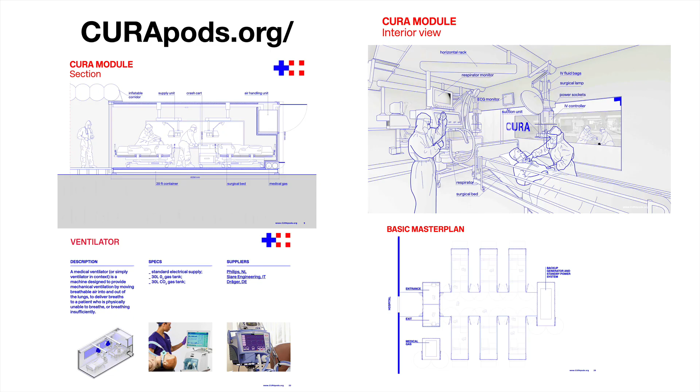This is a follow-up to Workshop 1 and 2. In Workshop 2, we looked at rapidly deployable healthcare facilities such as from Jupe and CURA pods, and we created modules from these standards published on the web for CURA pods using the Program to BIM website. We had Arthur Kurland from the University Health System participating in Workshop 2, and one of his questions was, can we use the CURA pods method of using containers to rapidly deploy healthcare facilities?

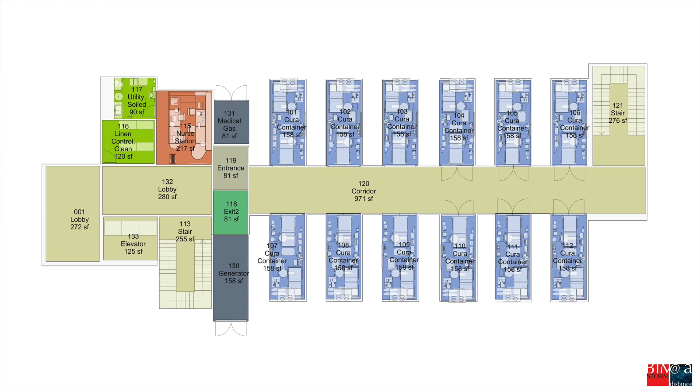And then also disassemble them and move them to a new location as needed? So we created a module of 12 units, as was suggested by Broadus. The layout is not 100% complete, but conceptually we wanted to get a rapid layout to see how it would fit on the site, and looked at all of the assets and content, and even did a scenario that said maybe it can go up more than one story. If you start stacking containers, is it even possible? We went ahead and tried that in this follow-up workshop.

We also took the requirements that were set up from Workshop 1 of what is required for a nursing area and support stations for a healthcare facility. Again, this is an early layout. It might have some errors in it still because we still need input from healthcare designers and facility planners. And we got some early cost estimates based on this layout. So that's what we're going to look at today, looking at the University Health System's facility in San Antonio.

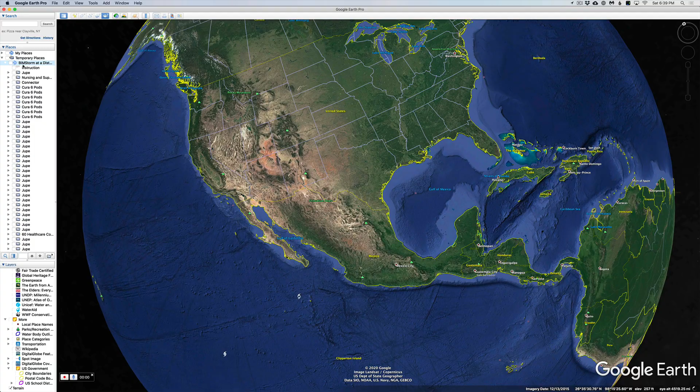And the scenario is, let's actually switch over live now. What Arthur Kurland suggested was a site in San Antonio where there's an existing University Health System to the south of San Antonio City, and there's a large empty parking lot on what used to be, appears to be, an elementary school site. He suggested we could actually do a layout there and do a study of how these CURA pods and temporary facilities can be laid out on this site.

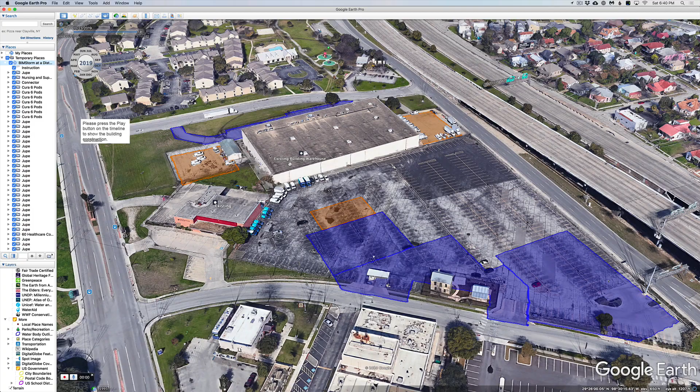Here is the existing healthcare facility, and to the north is the site that we selected, this triangular shaped site. So in the Onuma system, we actually laid out a preliminary site, did some studies on parking areas and areas where we could actually lay down some buildings.

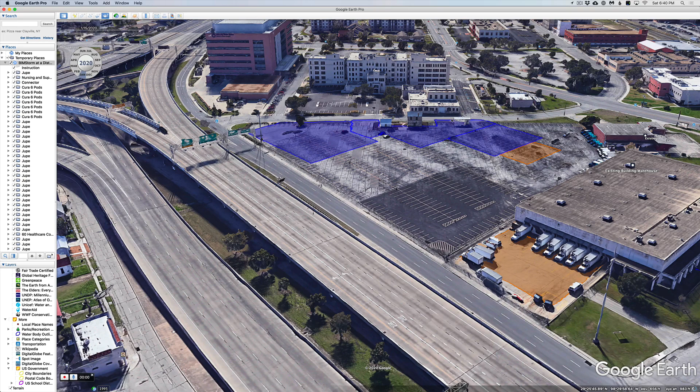The scenario is, if we start with the Jupe system, which can be put on trailers and flat packs basically, with 24 units on a trailer, what would it look like? We added a timeline to the building information models and said, what happens if we start building them sometime in May? What's the first thing that would happen? That would be the trucks showing up with the Jupe pods - 24 per truck, 40-foot trailer that can fit as a flat pack. And then as you lay them out, each of the units is here. So these are kind of like tent-like structures.

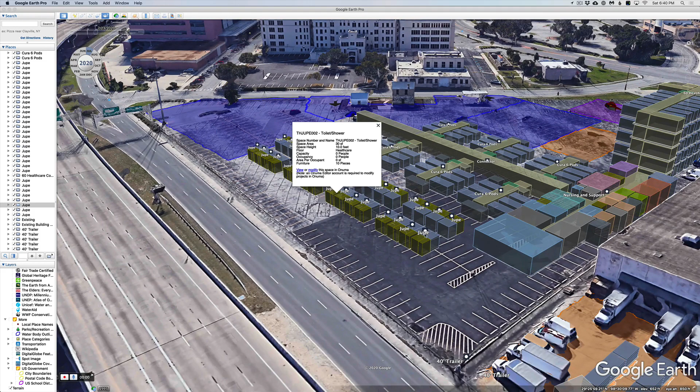That's one solution. The next solution is looking at the CURA pods that we looked at earlier, the containerized system. This will take a few days longer maybe, but if it's rapidly deployed by trailers and stacked, then possibly we can get a flat area here.

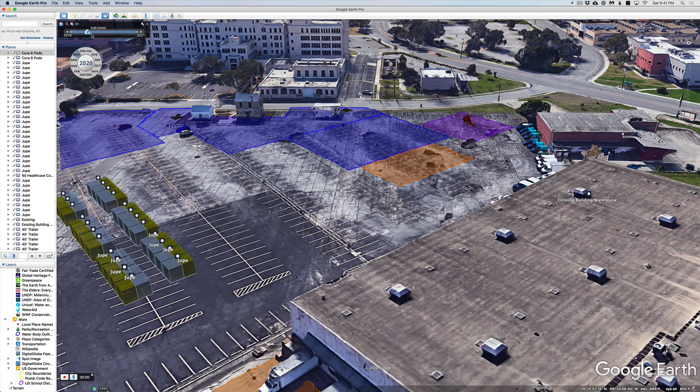And if we keep going with the timeline, you can see the potential for a tower being put in there. So this is a total of 60 units in this tower and 48 in the flat area for the CURA pods themselves. We also tried to look at scenarios of where we can land.

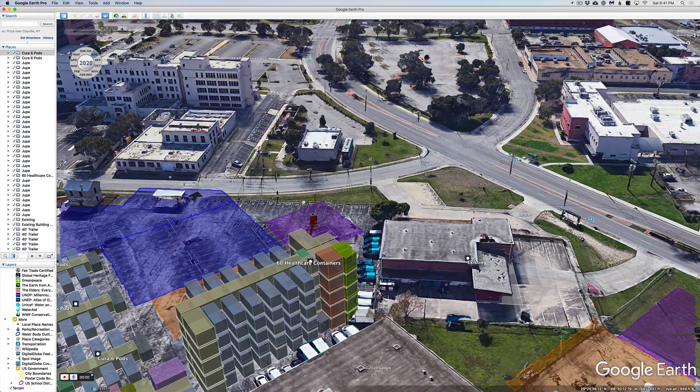Arthur was suggesting a helicopter pad, so we have a helicopter landing area there. And logistically, does this work? That's the scenario that we have here.

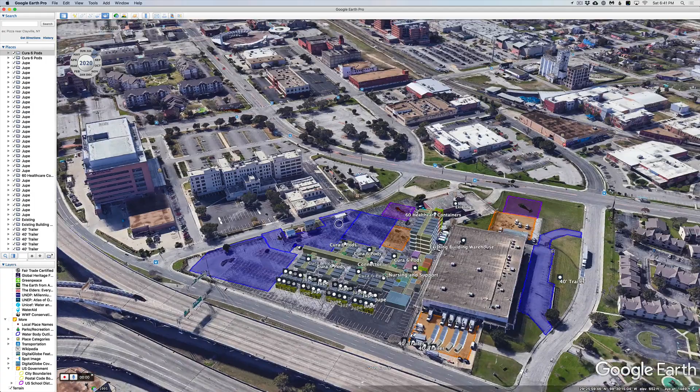If we have a site that looks like this, we have a place to load and offload trailers, a place to land new units, and even to decommission these as we go along. You can see in the timeline as it goes along, maybe in half a year or whatever, maybe it's time to take these units down and pack them up and move somewhere else.

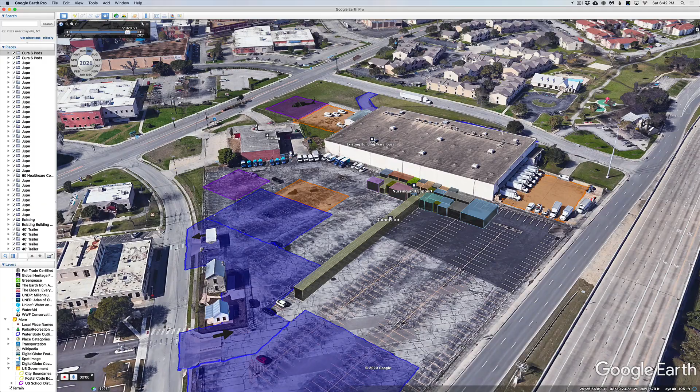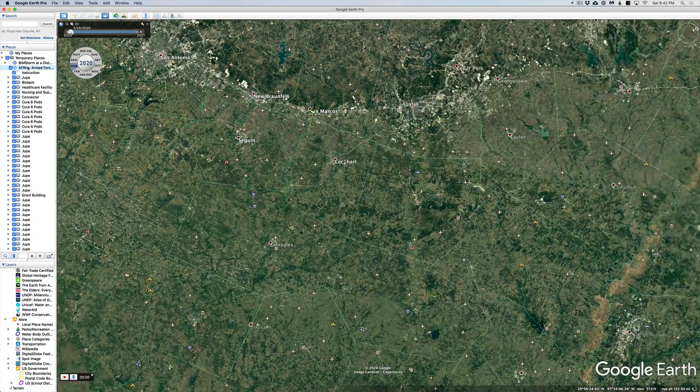So that was a scenario here in San Antonio. Let's say there's no need for these units here anymore, and we can take them back to the AFRH site in Washington, D.C. So that's the next scenario. We're going to fly away from San Antonio, and we landed them in Washington, D.C.

As we're flying there, I want to show one thing that we did with the scheduling. The scheduling was done in Excel and then imported into BIM. So the start and end date, a very simple Excel file.

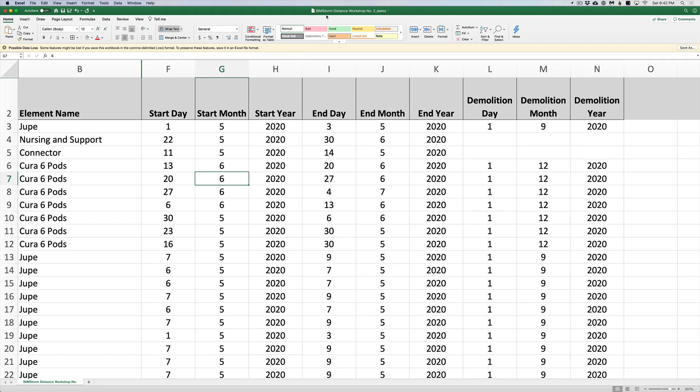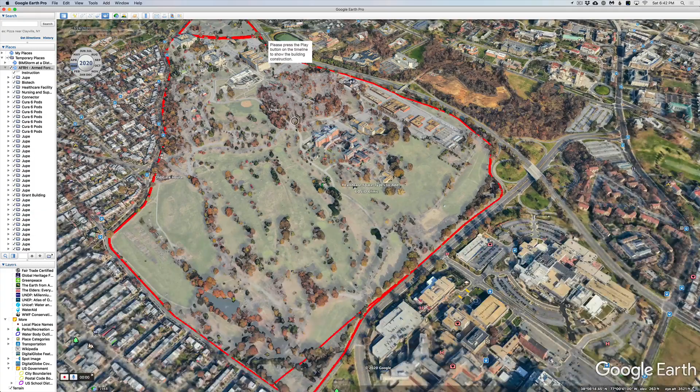We essentially took this Excel schedule and layered it into the Washington, D.C. site 9 months later. So we're saying 9 months later or 6 months later, whatever the timeline might be, we have the AFRH site here, existing facilities. We identified an open area here that potentially could be used as a landing place to land these units. Let's start the timeline here and see what it looks like.

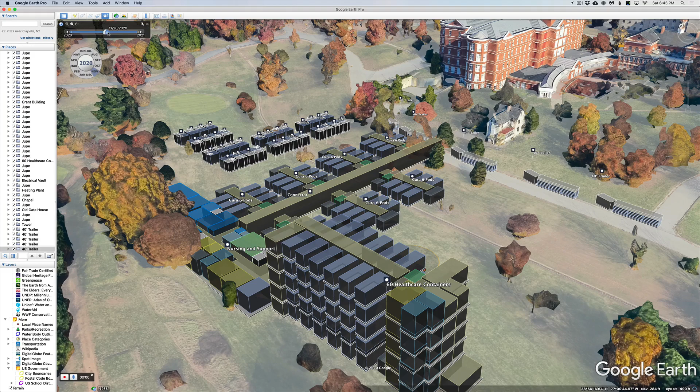So the first thing that happens is the trucks show up with the Jupe flat packs that then get placed on a site here. And then the next step would be to start building up the CURA pods, the containerized system. So a simple exercise, but when you start layering in time and logistics of how do you move around, does it make sense to even have it on the site? It might be a completely wrong idea, but to rapidly look at this and say, let's evaluate this.

How does this look from a perspective of housing this many containers and units and having a helicopter landing area and having existing facilities, even an existing hospital that's decommissioned here. So that's a scenario for the AFRH site.

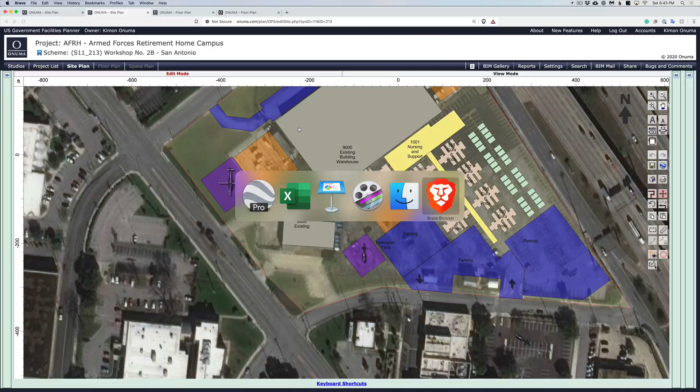And if we look closer at the units here, this is back to the San Antonio site. We looked at individual floor plans down to the equipment level. So because we started with these modules with equipment and asset lists, now these buildings, whether they're in Google Earth with all the assets inside it, it's basically keeping track of the data that's required from an asset perspective.

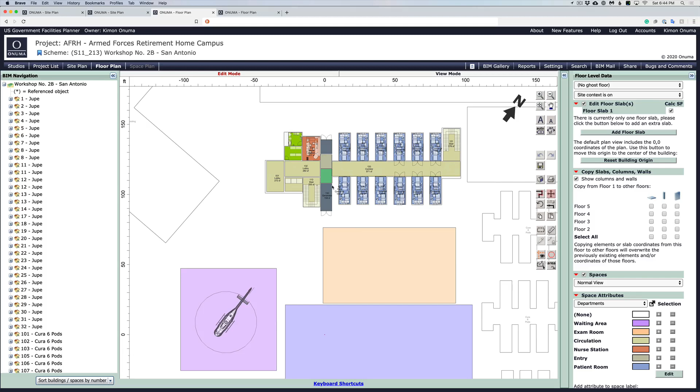And we can run scenarios like this of how does it fit on the site? What does a nursing station look like? In a web-enabled browser. So that was the objective here, is if we're on the web, then we can rapidly collaborate with others.

So that was the follow-up to Workshop 2. We're calling it kind of a 2B based on Arthur Kurland's input on the University Health System in San Antonio. And we've captured this in the PowerPoint slides as well.

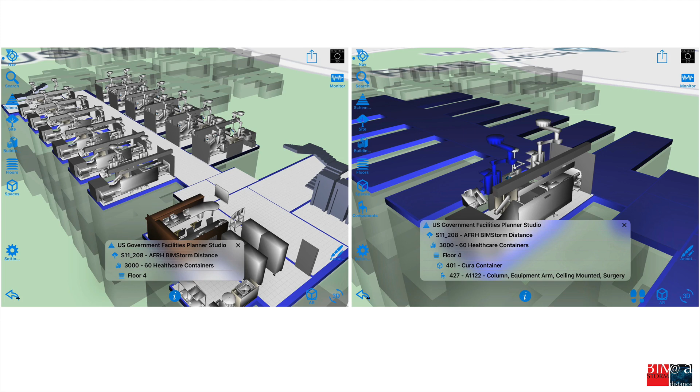And also in 3D on iPads, we can now look at the units. This is the 5th floor, the 6th floor, actually the 4th floor, with the containerized system there. It might be too dense here, maybe 4 floors is too much, maybe it only can handle 2, maybe it can only handle 1, but the input that we need now is, does this make sense?

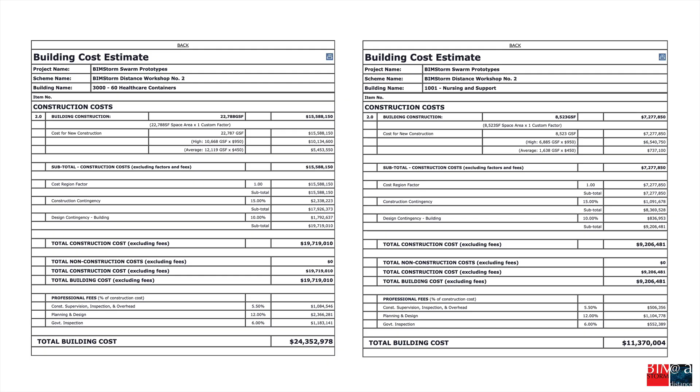And here's the early cost of one of the buildings, of 60 containers at $24 million for 60 containers, and the support facilities for that, and the site plan, and the overall view.